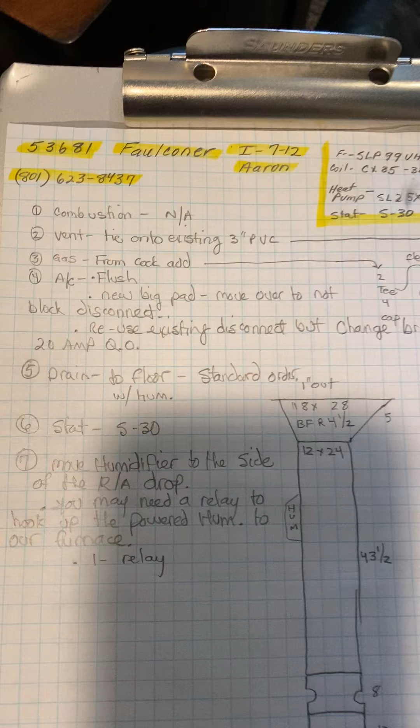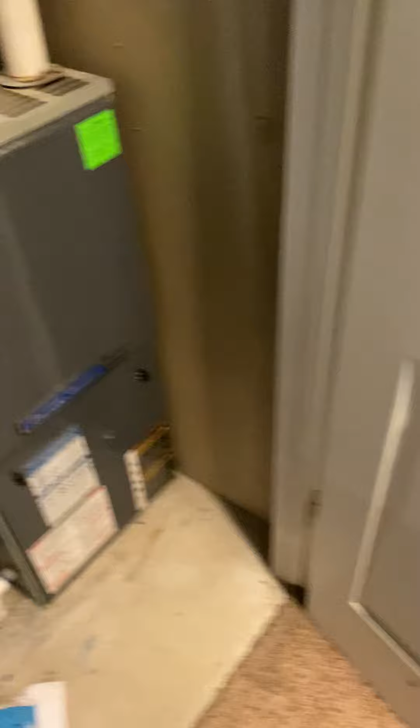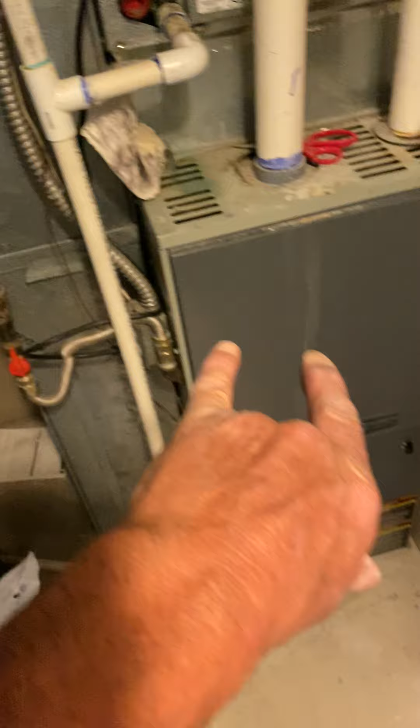Okay, this is on the Faulconer job, number 53681, installed on 7/12 by Aaron. Okay, so what we're doing is we are replacing this furnace. In the furnace room downstairs, there's two furnaces. This is the one for the basement, this is the one for the main level. So we're replacing this one.

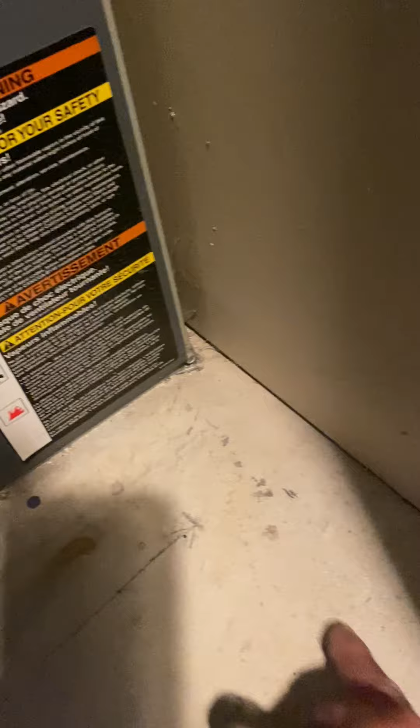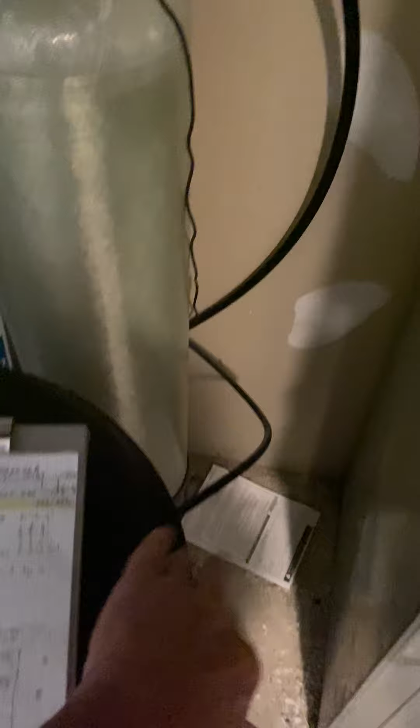Okay. So our new furnace will sit 4 inches from this wall here, right here, so we have access to the door frame. And then our furnace, a filter box, and a return air drop. So our return air drop is going to be right up against this. So you're going to have to just move this salt tank accordingly.

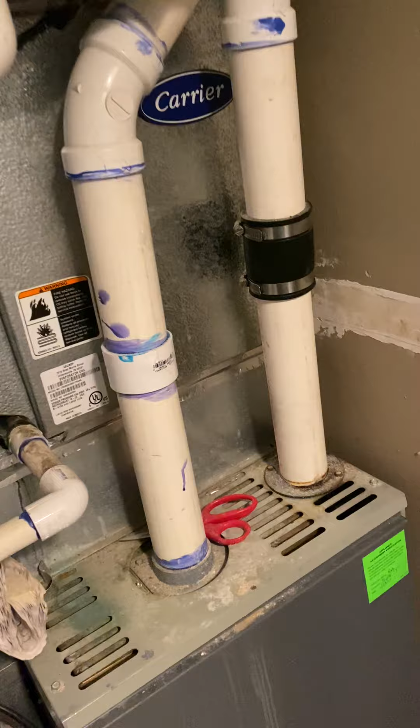On the return, I gave you cut lines here, 1 inch from each side. Furnace will sit at, you know, the back of this supply will be flat, so 1 inch from the back wall. Your cut line on the supply, I couldn't really get to it much, but it's back behind the humidifier.

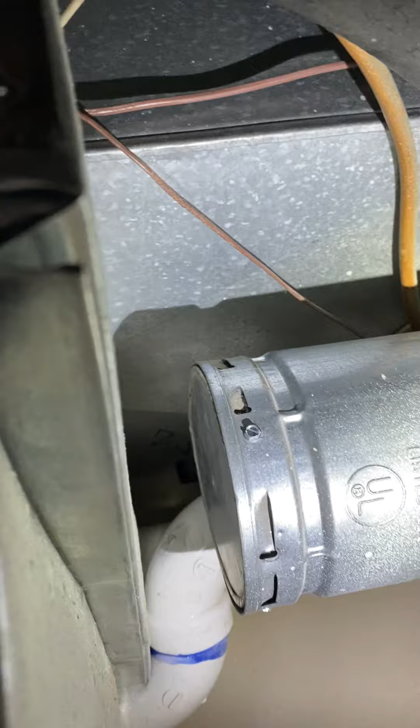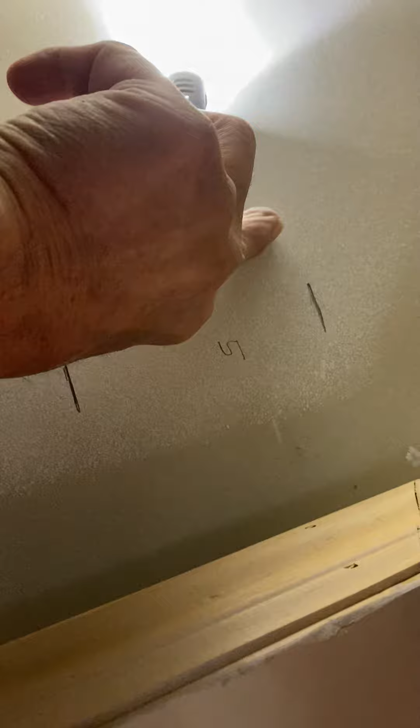Okay, it's back behind that flue. You can barely see it. I just kind of scribbled a cut line on there. Anyway, it's back there. But you're going to cut it same level as the bottom of the duct. I wrote it on the wall here. 5-inch starting collar, and then the canvas, and that on the wall.

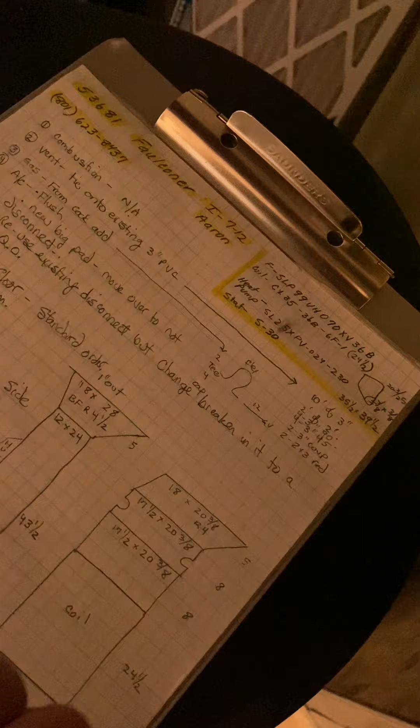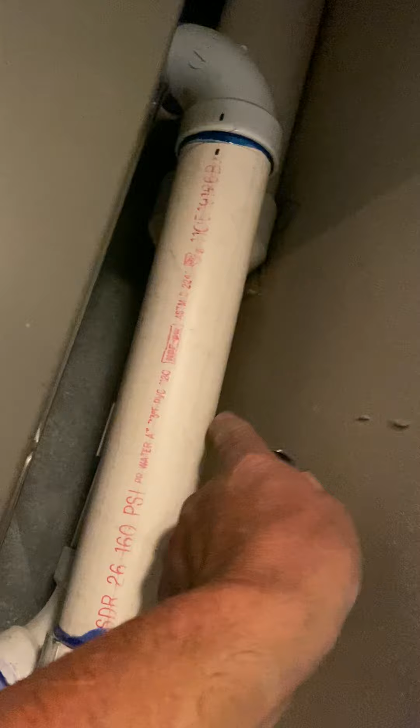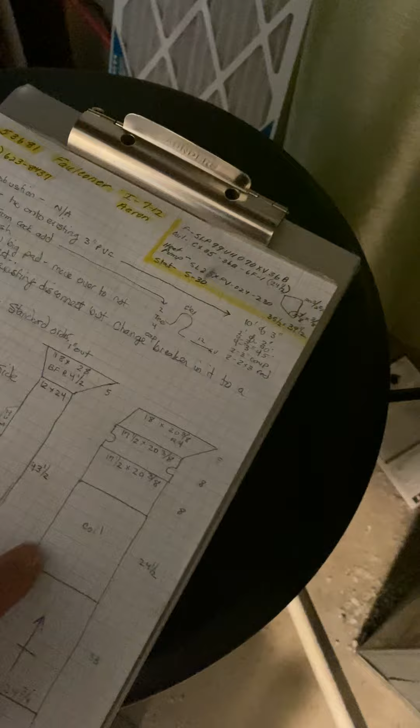But anyway, that's going to be an offset 4-inch starting collar that way, so you're actually going to cut it at the wall, the bottom of the duct. Then this is also going to offset that way, like 3.5 inches or something. Anyway, duct just as it shows. Going to sit on the base, 20 by 25 filter box. Duct just as it shows. Okay.

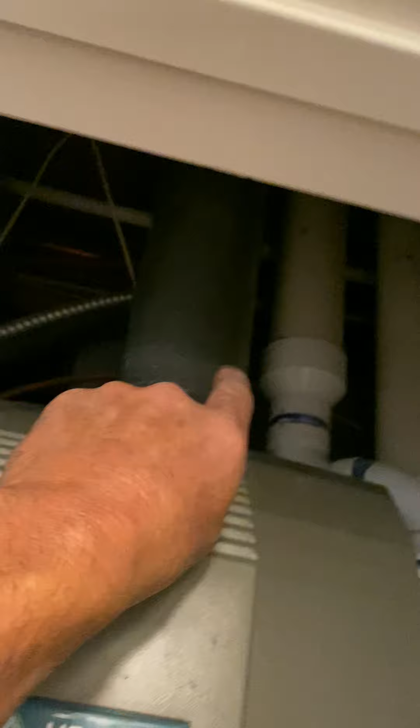Combustion air, not applicable. We've got high efficient everything in here. Your vent, you're going to tie onto the existing 3-inch PVC. I gave you 10 feet of 3-inch pipe, four 3-inch 45s to go over and do what you need to do. Gave you four 90s, so depending on what you want to do. Couple feet of 2-inch pipe and some reducers, so you should be able to get it from there.

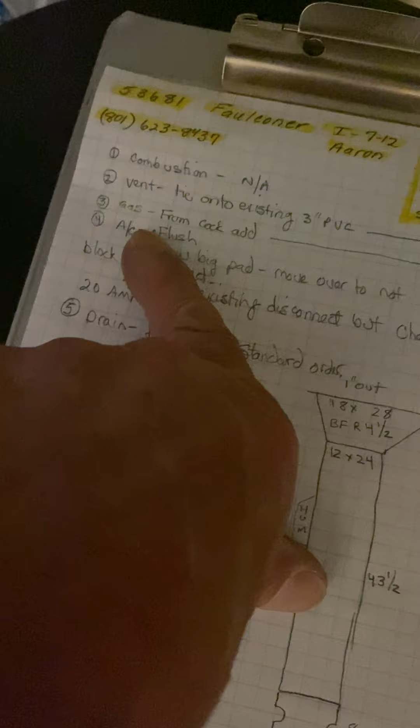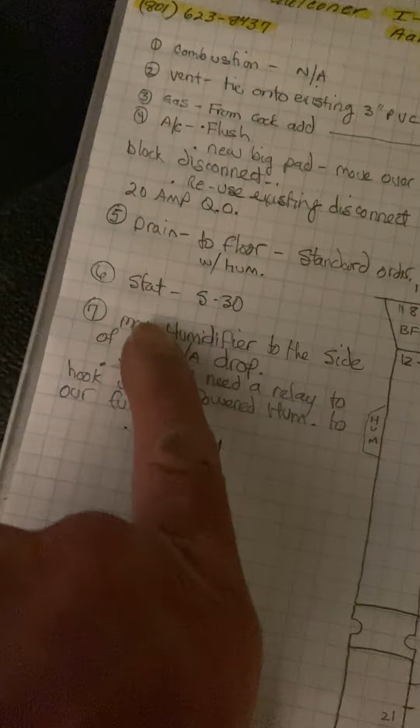The gas, just as it shows, from the cock, add a 2-inch, a T with the drip leg cap, flex, 12-inch into the furnace. Go over the AC in a minute. Drain just to the floor, standard order. Stat will be an S30. You do have plenty of wires going outside as well. Well, you know what? They must have spliced them somewhere. There's a big wire going out there.

So I will give you a transformer for that, because it looks like you have 8 wire going out there, but I think they moved the AC. It was once over here and ran all the line set out and around, and they must have added a bigger wire somewhere. There's definitely not 8 going in here. Anyway, okay, so I have to make note of that right now so I don't forget. That S30, so AC, XFMR. Okay.

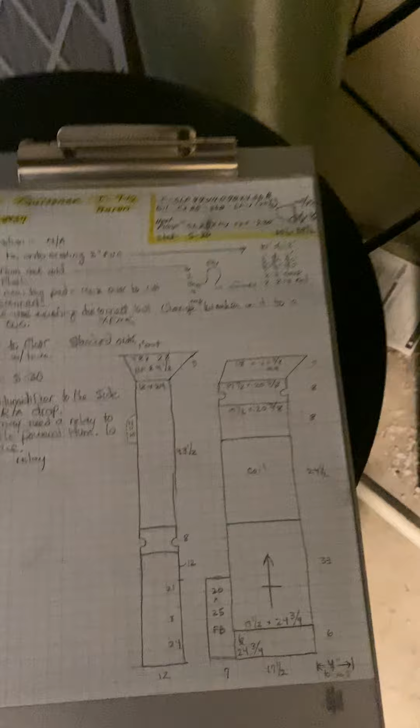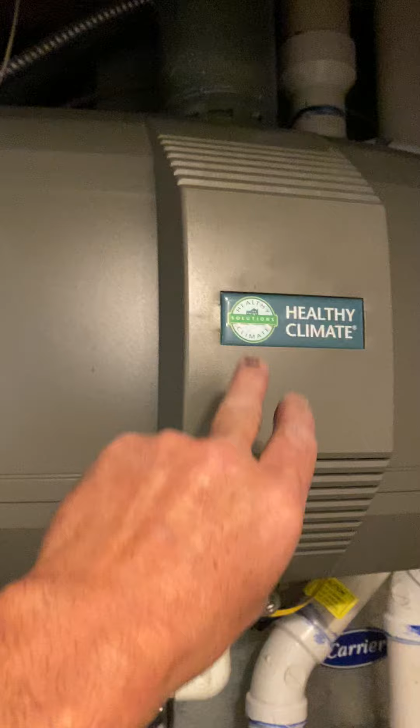Okay, so the humidifier right now is right here. Obviously we're going to need to move that, so we're going to just move it over to the side of the return air, over here. And I believe that power humidifiers put out their own 24 volts with the transformer in here, some do anyway. And I'm guessing this one probably does as well.

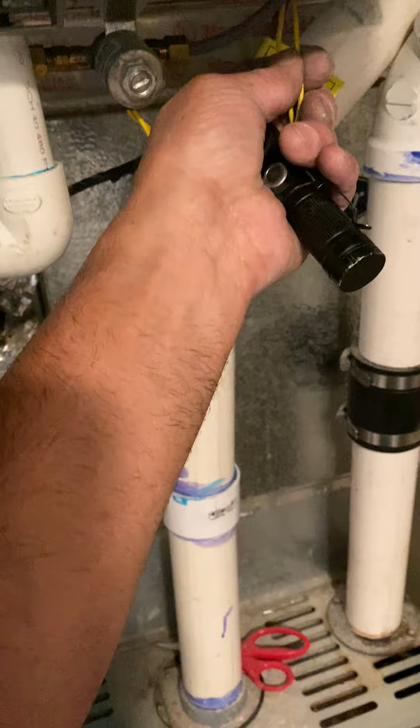So when you hook it up to our furnace, you'll probably need to use a relay, but just plug it in and touch these two wires together. If it comes on, then you know you need the relay. Okay. Move humidifier to the side of the return air drop. Okay. And that's about it. Oh wait, no, the AC. That's right.

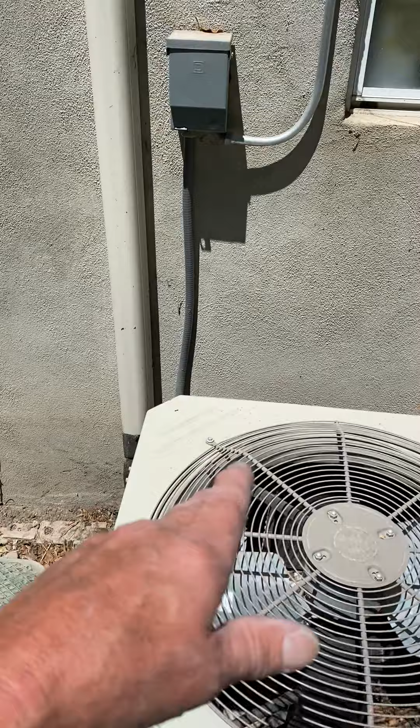Alright, let's go outside. So the AC sits in the backyard. There's a back door right out here. Right here, the one we're changing. Okay, so the breaker for it is coming off the main panel outside. It's a 30 amp breaker. Our max breaker is 25, but we'll add a 20. So we're going to reuse this existing disconnect, but add a 20 amp breaker in the disconnect.

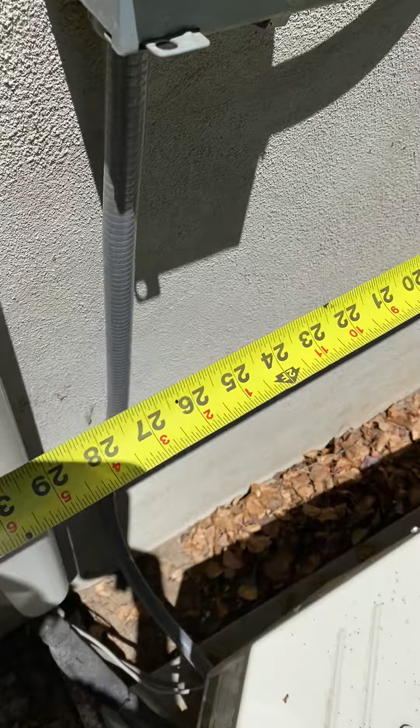So our new unit is the big one. It's going to sit on a big pad. It's 35.5 by 39.5. So from the side of the disconnect, we go all the way over to the wood. We can have 35.5 right against the wood, and we can always move this wood over a little bit if we need to, but yeah, just don't block the disconnect. Move your pad over if needed.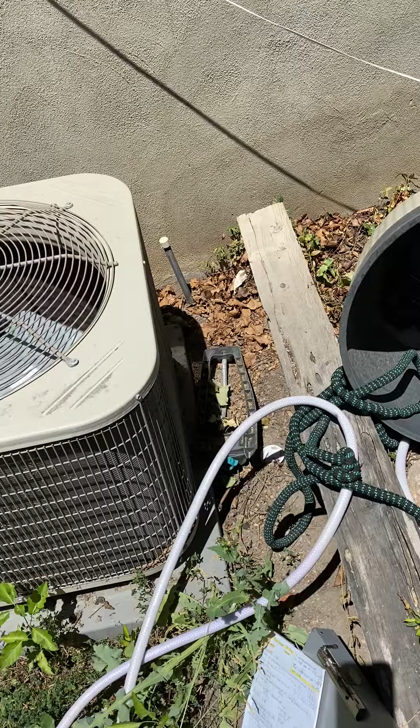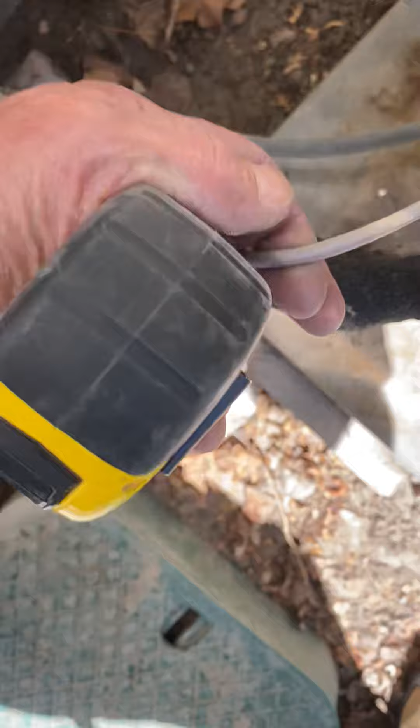And flush the lines. You can see they ran outside with all the lines in that. So yeah, they have 8 wire here, so somewhere they've spliced in here, I would think. Okay, what else? Let's see. New big pad. Reuse existing disconnect, change breaker. Okay, that's it. Thanks.